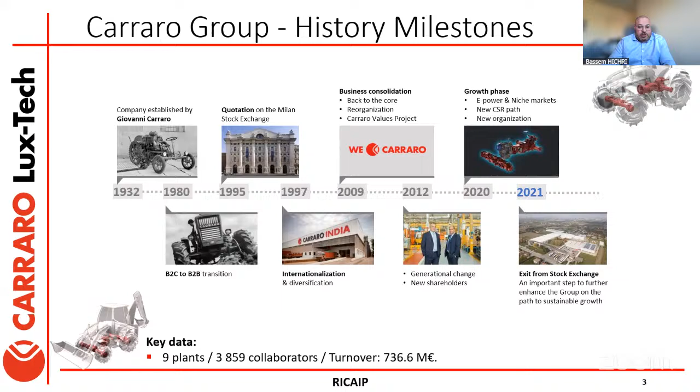In terms of global footprint, as you can see, Carraro Group is installed in different continents with different placements and different types of plants for production, for drivelines and tractors, mainly in Italy. In Italy, we have a specific plant called Agritalia to manufacture full tractors, really small and medium tractors, and also plants for the production of drivelines and gears.

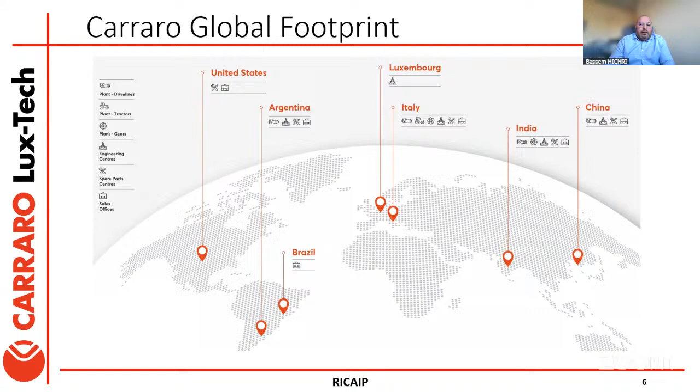So our core business, as you can see in the slide, we have mainly these areas where we are performing activities. We have a specific plant in Italy for production of heavy-duty gears, really producing and manufacturing high-quality gears for OEMs in every sector. We have all the different types of gears, bevel gears, cylindrical gears, or other specific gears that we provide to our customers.

In terms of drivelines, we are a tier 1 supplier for integrated power transmission solutions: front axle, rear axle, and the transmission system based on different technologies. As I was mentioning in the previous slide, we have a specific plant for production and manufacturing of full tractors dedicated to the agriculture field, and we can also provide specialized tractors for major OEMs.

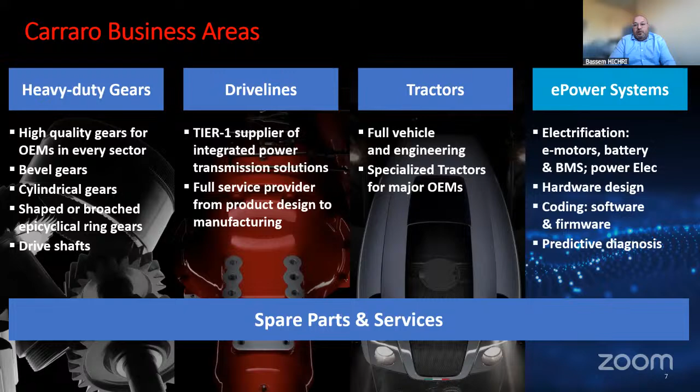In recent years, we are also working on e-power systems, considering electrical motor technologies, batteries, power electronics. We also work on hardware design and software and firmware design, and we develop internal activities related to data collection, mainly for predictive maintenance of our products. And of course we have our spare parts offices and after-sales services that we can provide to all our customers.

Now I'm moving to talk more specifically about the Carraro Lux-Tech R&D Centre in Luxembourg, which was launched in February 2023. So it's almost 2 years now working and performing engineering activities and mainly R&D activities. The specialty of this new center is to execute and bring to real life the new ideas and projects of Carraro Group related to electrification of drivelines and drivetrains.

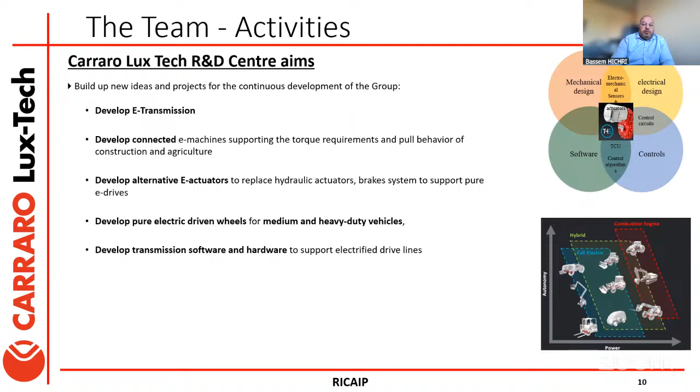So here, the scope and the target market. It's about the off-highway market, which is undergoing a similar path as on-highway, the normal passenger cars, regarding electrification. Although the off-highway market has a longer elapse of time, and it has significant differences driven by specific aspects, which we call mission profiles of several types of equipment.

So if we talk about a normal passenger car, it's supposed to be running and driven on the road. Whereas off-highway equipment, for example construction equipment, is dedicated to perform specific tasks, which we call the mission profile. So it can do some work in a specific field. It can run on roads, and this makes the difference and brings more challenges in terms of electrification of this equipment.

So electrification is realized sooner and is economically sustainable in compact equipment. So we are targeting mainly small to medium construction equipment and tractors, which can be more easily electrified compared to really heavy vehicles. And today there are already several examples of compact equipment in production, and they are actually using batteries and electrified solutions.

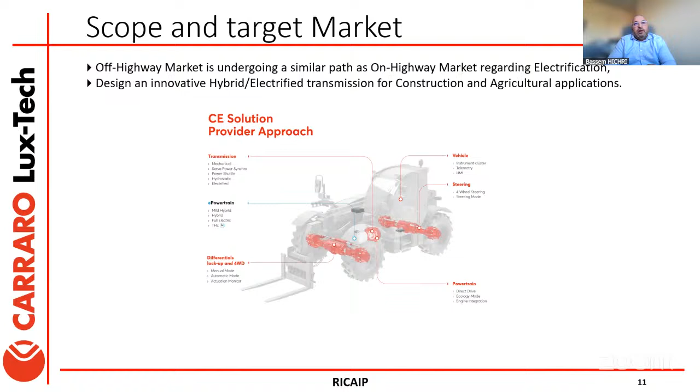The goal of our center here is to design an innovative, either hybrid or electrified, transmission for construction and agriculture applications. So here's a small table summarizing an internal study made by our group. It's about the electrification tendency between 2021 and 2030 for construction equipment: mini loaders, compact track loaders, mini excavators, backhoe loaders, site dumpers, walk-behind compactors, and telescopic handlers. These are expected to move from 0% electrified equipment to a maximum of 25%.

And in terms of agriculture equipment and vehicles, it's about tractors with different horsepowers and some specific agriculture equipment. Here the electrification from 2021 to 2030 will evolve between 0% and 50%, like the high clearance tractors. So as you can see, the market is really huge, and we try to be, not the first one, but in the list of the first companies moving toward this new market and the new electrified systems dedicated to it.

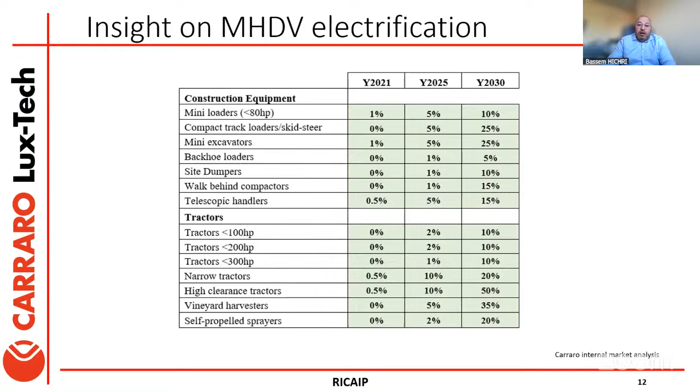So after giving this insight, I'm moving to talk specifically about the first project we are developing in our R&D center. It's called eTrans, Electrified Transmission for Medium and Heavy Duty Vehicles. We were motivated by the fact that medium and heavy duty vehicles are responsible for a major part of greenhouse gas and harmful particle emissions. One of the main targets is to reduce CO2 emissions and air pollution and seek a cleaner, more sustainable future. Our motivation is also guided by customer demand, public health and awareness of environmental issues, and, as for passenger cars, government policies promoting electrification.

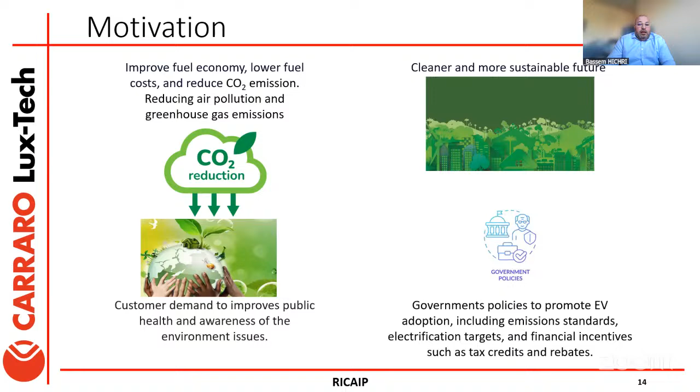In terms of challenges related to eTrans, we would like the identification of a product architecture for physical validation, which will represent a new generation of heavy-duty drivetrains, and name the key design parameters to optimize the transmission. We would like to adapt the product architecture to customer needs, so we're offering a solution that satisfies a set of customer needs.

For this eTrans project, the customer can select different features in the transmission. For example, a 1-speed or 2-speed version. In terms of shifting, either synchro shifting or power shifting. There are also options like 2-wheel drive or 4-wheel drive, and park brakes. I will show this more in the system architecture later, but this product can really be tailored to specific customer needs. We also provide a similar shape for different versions, where the customer can use the same system in either a fully electrified or a hybrid vehicle.

The transmission also can be placed in different configurations. It will be much more clear in the next slides. And the next challenge is related to the development of a real-time simulation environment for a faster and more efficient development process. So it's a flexible asset for rapidly validating new architectures and control algorithms for academic publications and industrial patents.

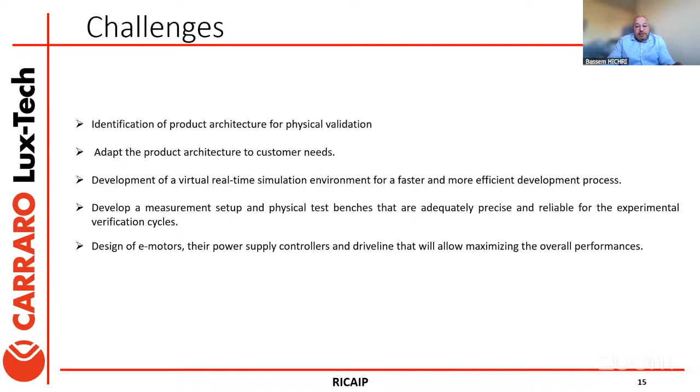So about the description of the system itself. It's a design of a versatile 2-speed gearbox able to fit both construction equipment and agriculture applications from 50 kilowatt to 120 kilowatt with a maximum speed of 45 kilometers per hour. We are offering two versions, using hydrostatic or electrical drive. It is proposed to ease the transition to electrified vehicles.

So this project duration is 3 years, and it started officially in June '24, and it is supposed to end in May '26. At the end of last year, '24, we have the prototypes available for customers to be tested and validated in real vehicles in the field, and the production is planned to be in the second quarter of 2026.

So during the development of this project, we were working closely with the suppliers and customers in order to provide the suitable product based on our customers' needs and based on what is existing from our suppliers in terms of technologies to be included in our systems. And the total cost of the project is around 4.6 million.

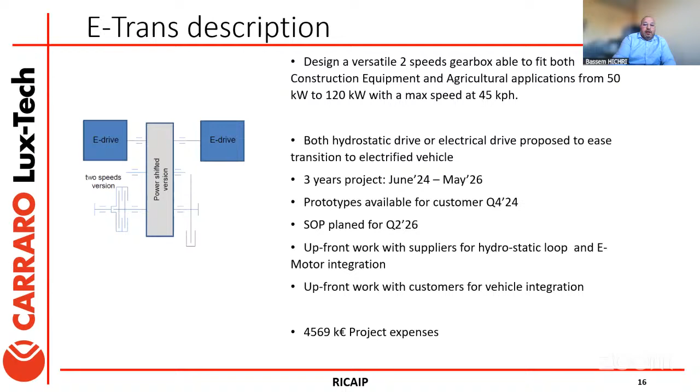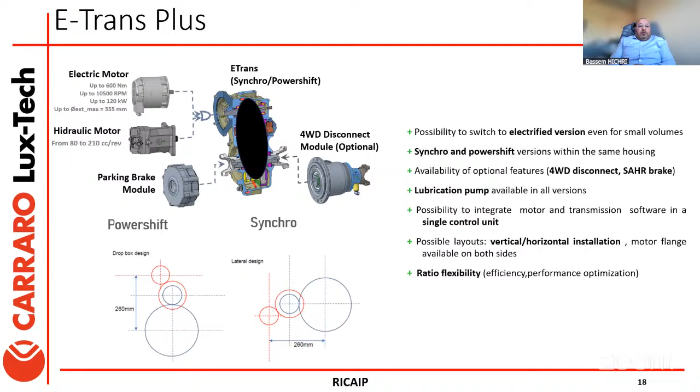Just talking a bit more specifically about this shifting strategy. We developed an integrated control that allows us to manage the shifting using the engine to synchronize the shafts during the shifting operation. In case we are using the oil coming from the vehicle for our system, if the oil pressure is not available, the transmission can operate as a standalone system.

And in this version of the transmission, we integrated the proportional valve and a linear sensor for the synchro shift system, which provide precise control for the shifting, and specific additional components such as the accumulator that allows using a small pump for the actuation, and an external pump that provides oil pressure for actuation.

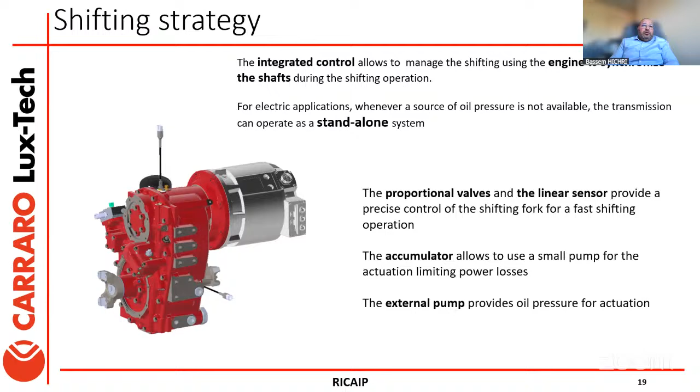So now I'm moving to talk a bit about the control side, where, in addition to the hardware design, manufacturing, and testing, we are also working on providing the full solution, also related to the software development. So our strategy to develop the software is using model-based design for our system control, which consists of mathematical and visual methods of addressing problems associated with designing complex control, signal processing, and communication systems.

And we are mainly using MATLAB as the software for this development, where we can model objects that represent individual components of the control architecture, such as the actuators, the sensors, or the controllers. And we can connect the model objects to build aggregate models of block diagrams that represent the combined response of multiple elements. After making the model-based design, we also make the application and firmware code in order to integrate the embedded software in a specific control unit.

It's not manufactured in-house, but we have specific partners with whom we have been working for years now, and we are using their systems, which are adapted to our developments and for the control of our equipment. In terms of functional safety framework, we are mainly working under different standards such as ISO 19014 and 13849.

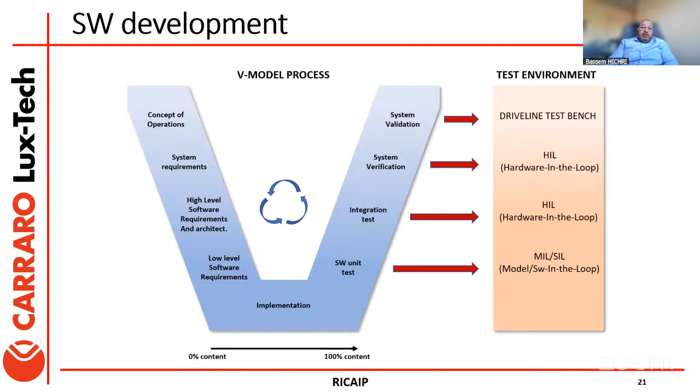So talking about testing and validation, we invested quite some money in building and developing a test bench for the experimental validation of the different equipment that we are developing in-house. And as I said, the first product is e-trans, and we are using the test bench to make functionality and durability tests for all the aspects related to the validation process of drivelines and transmission systems.

As you can see, the system is composed of a central part, which is an electrical motor that drives the transmission. And on the output, we have two big motors on the two sides. It's about simulating the real conditions of the vehicle or construction equipment. So we have two motors that will simulate the real behavior of the vehicle in order to test the transmission in similar conditions as in the field.

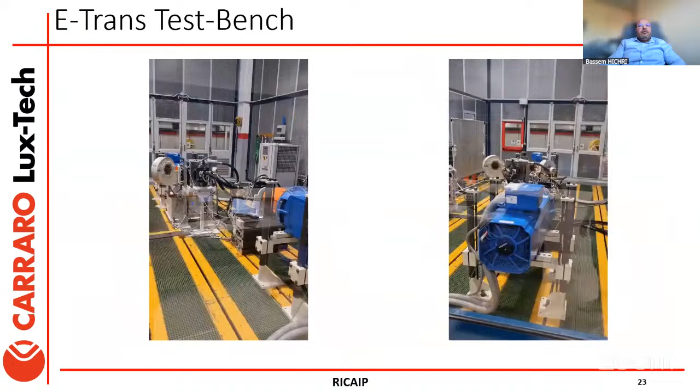So here you can see in the next slide, yeah, the two videos. Sorry. So here you can see the two videos. I don't know if it's moving. It's not. Yeah. No, it's moving.

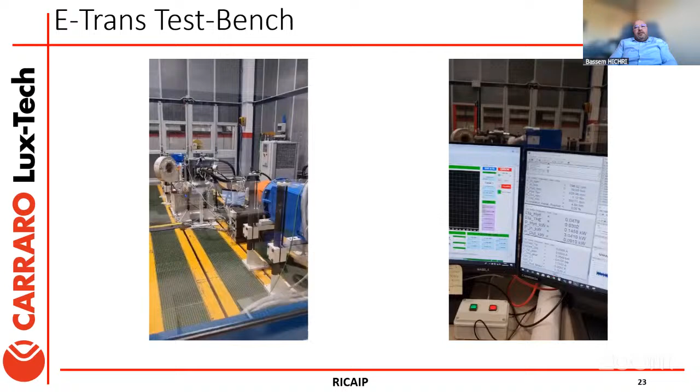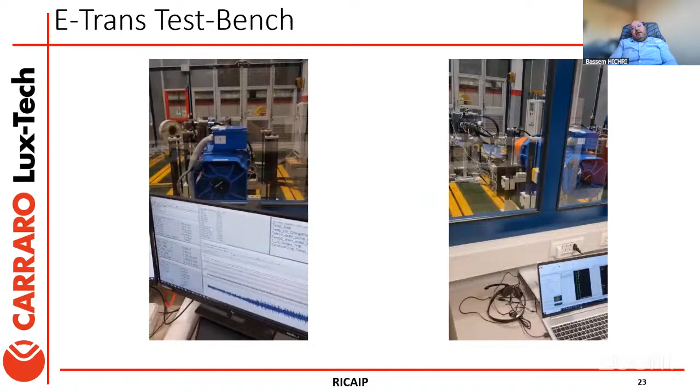And at the same time, we are developing a simulation environment, and we are correlating the experimental results with the simulation results. The goal in parallel to this project is to develop a simulation environment that provides us a reliable test environment in order to reduce the manufacturing of multiple prototypes. So this will help a lot in reducing costs and also reducing waste.

In terms of timing and design, we have almost finalized the design of this transmission. We've been performing lab tests for validation of the prototypes for several months now, and it's still in progress before delivering the final results.

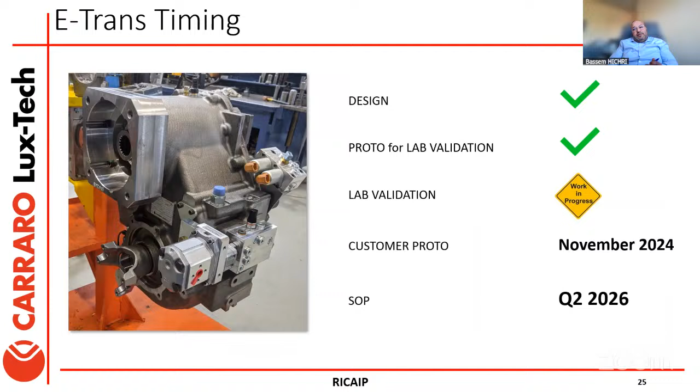We have had some prototypes available for customers starting from November last year. And as I mentioned, the production of this system to be commercialized is planned for Q2 2026. I think this was my last slide.

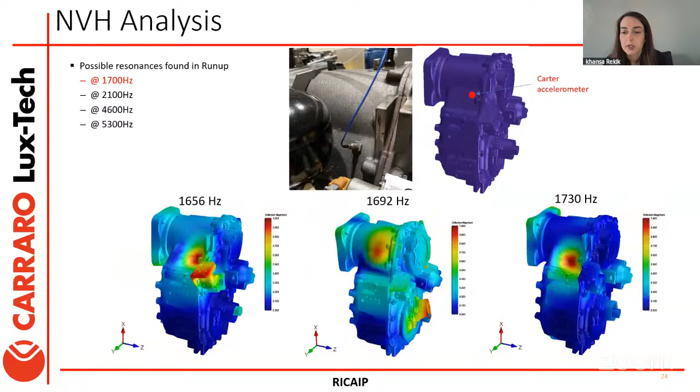I'm not sure if you have the raising hand functionality on Zoom. If not, I will just try to unmute. Okay, so maybe I will start with a question.

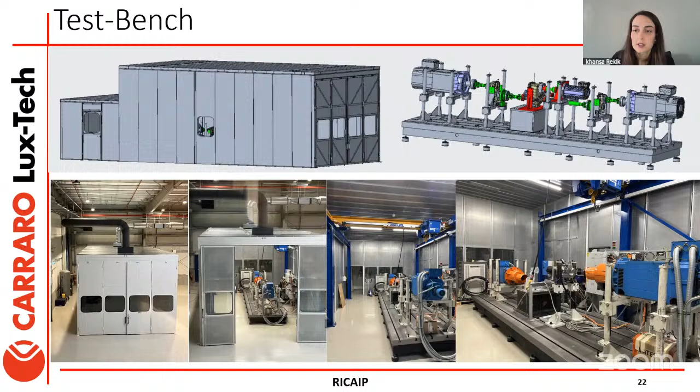What is the specificity of this system, of the e-trans transmission system? What makes it special?

The second point about specificity is that this transmission can be adapted to customer needs, in terms of gear ratio, options, and so on. So that's mainly the specificity of the e-trans project.

So do you develop the product upon customer request, or do you already have a set of variants, so to say?

In fact, that's the point. The e-trans project started as a pure research project, and that's why we have a partner in this project, a public institution, the University of Luxembourg, where 3 postdocs are working in parallel with us for the development as an R&D project. It's also a national project supported by the state because it targets electrification, a priority for the state and Europe in terms of CO2 reduction.